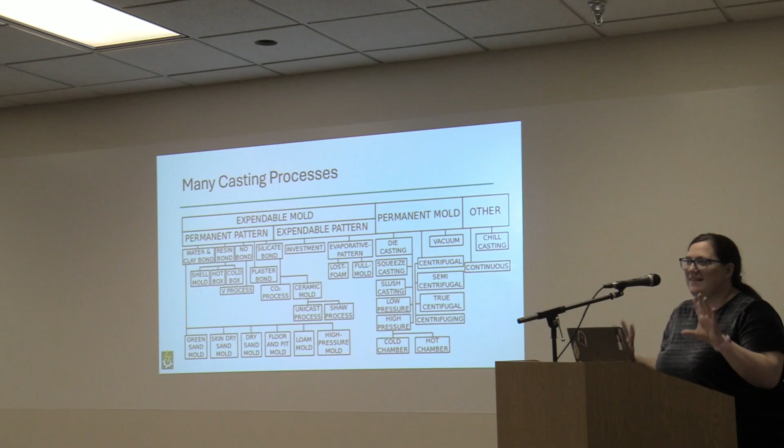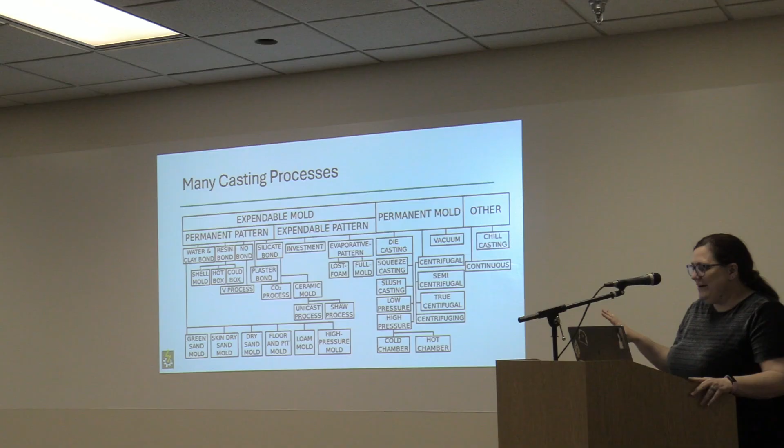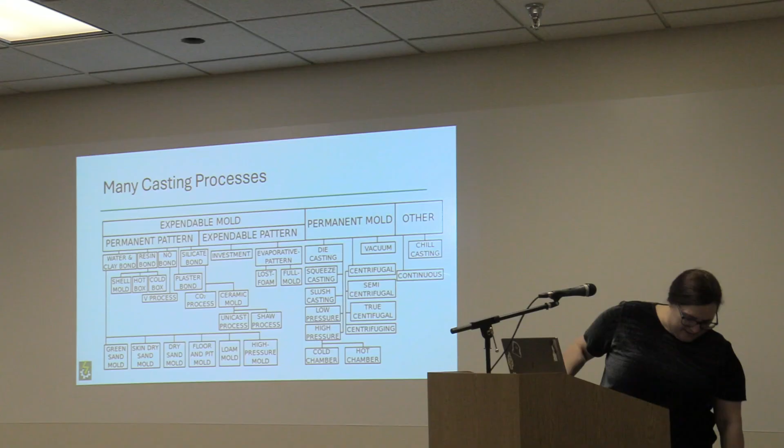There are a lot of casting processes. A lot of people just think, oh, that's just casting. This is one method of classifying things, and these are the conventional casting processes. They tend to group them by the type of mold, type of patterns. Some of these you might notice aren't things that make castings, right? People don't typically talk about steel mill processes as making castings - you're doing casting, but you're making bars or I-beams or ingots or whatever it is. But all of these things start out as castings.

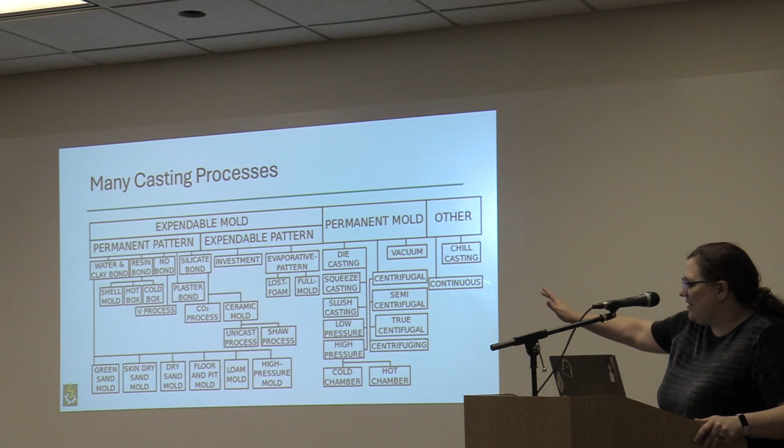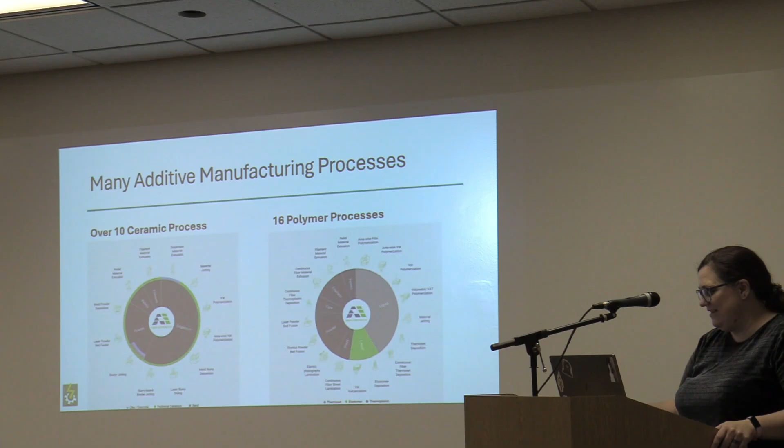That will come up later. They say there's 16 polymer processes using all kinds of different means, and they count over 20 metal processes. Then they kind of give up and just say miscellaneous, grouping a whole bunch of extra things they didn't feel like dividing out separately. They didn't used to include cold spray, but I guess they thought cold spray got big enough that it got its own part of the pie chart.

But some other things not listed: electrochemical additive. I used to work at Fabrisonic, which focuses on ultrasonic additive, a sheet lamination process. And there's all kinds of other things that aren't listed - new things being created all the time if you go to industry trade shows like I do.

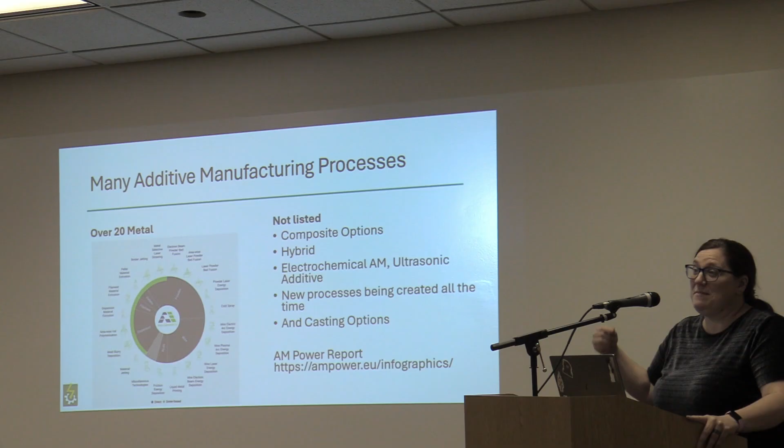And one of the things not listed here is casting. So when they define additive in metal, they're talking about metal as the feedstock, not that you're making metal. But from my perspective, that is misguided, I'll say. Because, like I said the other day, most people don't care about the feedstock, or really, they don't necessarily even care about the process - they care about the part they want.

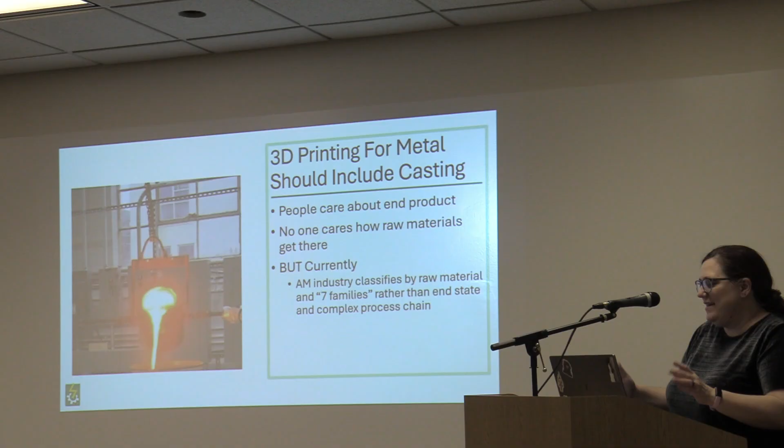And they care about that it meets their requirements, not necessarily how it got there. Actually, most people don't even care if it was machined or additive at all. They just want that thing, whatever that is. But currently the industry groups things by raw material, and a lot of times by these AM families.

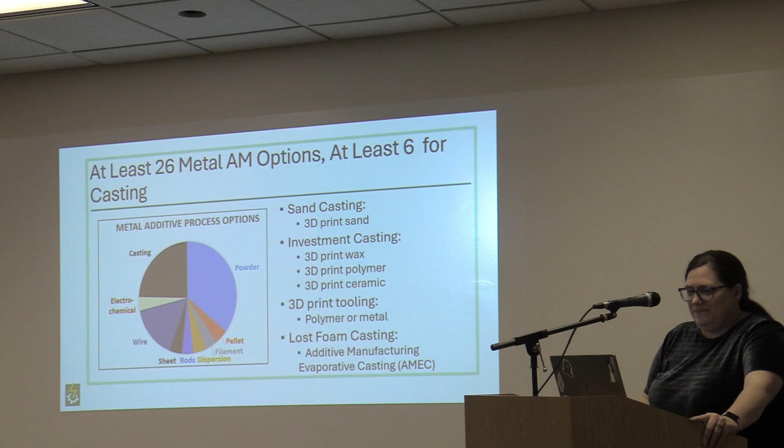So at least in my perspective, the metal chart should be bigger and include the casting options. There's at least 6 or 7 of these, depending on how you count, maybe more. But I'm going to talk about them here a little bit more in depth before I get into what we do at Skuld. We create sand, and there's a variety of things for investment casting, for tooling, etc. So how many out of these options there are really depends on how you count options.

So why would you want to use AM instead of these direct metal options? I know a few months ago you had someone, I think from Velo3D, come talk, because I saw that on the website. So they're already doing powder bed fusion 3D printing. So there's a number of reasons that people are really starting to look at AM for casting especially.

This is very much driven by the military and the government. So one of the problems, direct metal additive costs a lot. It can easily cost more than 10 times more than your traditional casting. So if normal steel casting might be $2 a pound, let's say, you're probably minimum starting at $20 a pound.

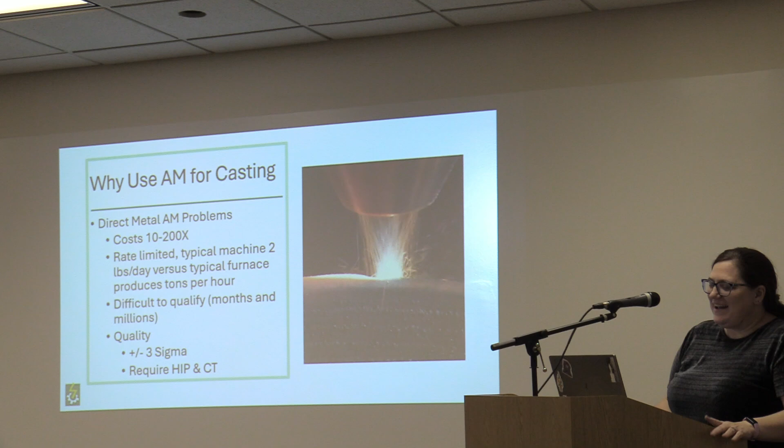I will get off that rant for a little bit. But I'm going to talk about additive and casting. So there's a number of ways that this is done. Probably one of the most common ways this is actually done is by printing tooling itself. It's not to directly go to the casting or the mold or the pattern, it's to print the tooling.

All those other additive processes I showed you could be used for printing tooling in theory. Most of the time people are using desktop FDM printers for that because they're cheap and readily available. You can join multiple prints together if you're trying to make something large. It's relatively inexpensive doing it that way. Although for bigger parts, sometimes people will print on other materials, and sometimes you have to have a tool that's metal.

So the main reason people are doing this is for large metal material for tooling, particularly ingots - very thick ones. These things are exponentially increasing in cost as you go bigger, and they have really long lead times. Like if you didn't plan for your die for Toyota 2 years ago, and now you suddenly need a different one, or it's defective, you might have an 18 to 36 month lead time to get that new metal ingot for that mold.

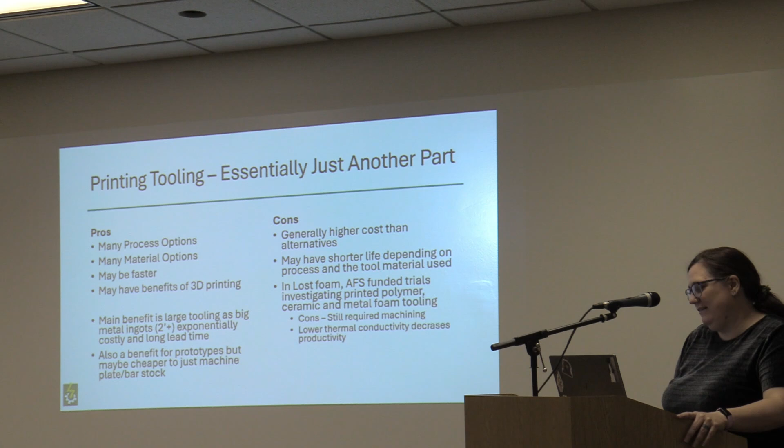Typically these things all still need machining. So that's part of why you're not necessarily benefiting doing that versus a piece of aluminum plate - because if you're still going to have to program the CNC machine, you're not saving that much having printed the material in the first place. The other issue, especially when they tested ceramic and polymer tools, is you can make foam that way, but the thermal conductivity is so much less that you end up taking something that might be a 2 or 3 minute cycle time, and now it's a half an hour cycle time. So that's not very good for productivity. Typically, people want aluminum molds for at least making foam.

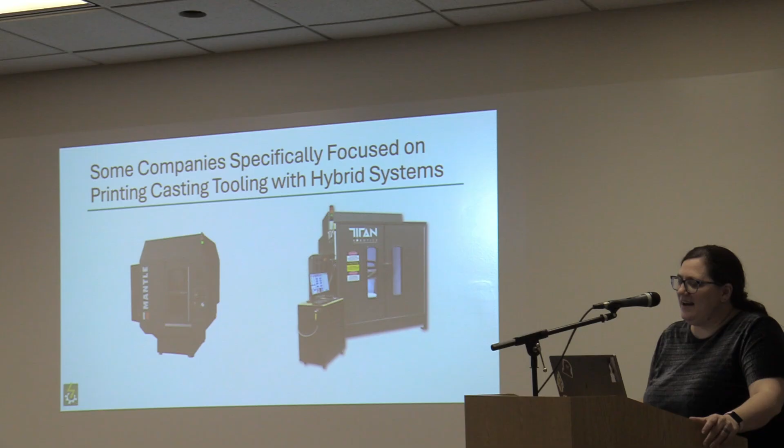There are some companies that are focused on making tooling specifically for the casting industry. I've highlighted two of them here. Mantle has an interesting technology - I don't exactly know what they call it, but they essentially put down this paste material, and then they machine it back, and that's how they get the tool. Titan Robotics has a giant polymer 3D printer. It's also hybrid, so it's designed to account for the fact that you might need tighter tolerances and have to get the tooling to required tolerances.

So to move on from tooling, let's talk about additive and die casting. I'd say this is the area that has, I guess, the least options besides just making the tooling. They will use various methods as well to make inserts, and that can particularly be helpful if you're trying to deal with something that has wear surfaces, and maybe there's just one little area that's getting messed up. So they might just use an insert and replace part of the tool in a certain spot.

It's also sometimes possible to iterate faster if you're using the additive versions. But big cons are that typically die casting is going to require a metal tool - possibly for permanent mold you might be able to have aluminum or copper depending on what you're trying to cast. But typically these are steel and relatively big, so now you're back to the original problem of these printed metal parts being very expensive. So people are not typically printing the whole tool, although sometimes they are doing this for conformal cooling benefits, just because of the cost.

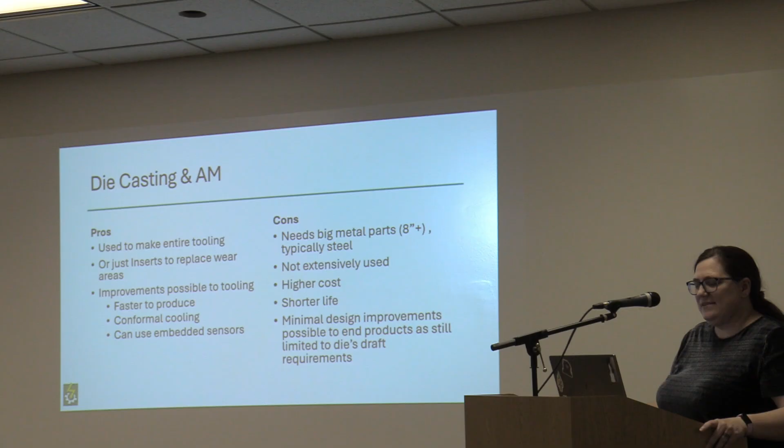There is one company that markets themselves, that I am aware of, specifically to the die casting alternative, which is Foundry Lab. They have a very interesting system that is essentially what I consider a kind of emerging category, which is a micro foundry. So this whole thing is a foundry - it makes your mold, it melts the metal, and pours the metal.

So it is very interesting in that it's an all-in-one system. They market it as a substitute for die casting, but as a metallurgical engineer, if your mold's not metal and it's a ceramic binder jet mold, you're not going to get the same representative properties as if you had used a metal mold. But people are using that for prototyping.

Every time you come up with a con, it seems like it's a fatal flaw. I don't necessarily think that. People use these, so they're drawbacks, like higher costs, but there are reasons people use these, so it's not like they don't use them at all. There are pros and cons to everything.

Would I choose to use this if the metallurgy properties were super critical? No. If it was close enough, or it was a less critical application, and if I'm doing this for a prototype, maybe it's adequate. Or maybe you prototype it that way, test it, it works, and then you can just keep making it this way. Is it die casting? No.

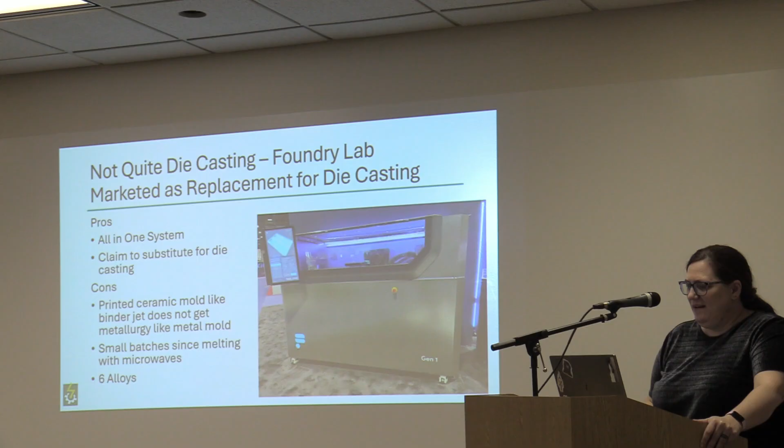Green sand and resin bonded sand - these are probably the most common casting methods. If you don't know what green sand is, it's basically sand, clay, and water mixed together. It's called that because historically green meant wet, like green wood means it's not dried out, so green sand means it's got moisture in it. This technology's been around for over 3,000 years, so lots of things are quite old technologies, but still useful today.

But they are using additive in that process as well. Green sand typically has about plus or minus 3% tolerances, which means in a lot of applications it's going to need machining, sometimes substantial machining. Because you're just packing together wet sand bonded with clay, it is a little bit more limited in the geometries you can achieve.

Resin bonded sand, I think that was invented in maybe the 40s or 50s. It's basically adding glue resin to the sand to make it stick together. It can have a lot more complicated geometries, it can also have larger parts, but often it's getting very significant machining. If you've ever been in a no-bake foundry, you'll know what I mean when I say it's more polluting, because when you pour those molds, that resin is getting burned during the casting process.

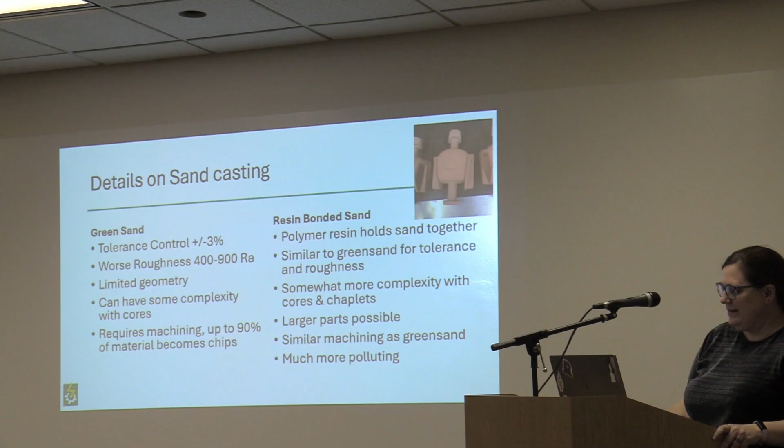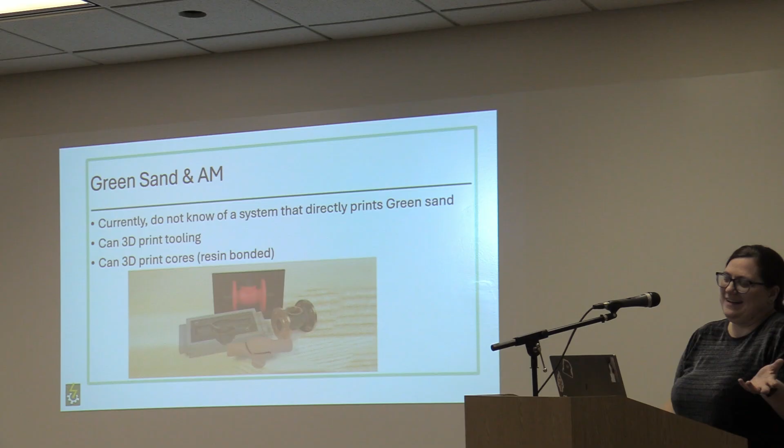So for green sand, they will use printed tools, and sometimes they'll also print cores - so it'll be like the green sand mold, but the core itself will be 3D printed with resin. That's probably the most common way. As far as I know, there is no system that exists that 3D prints green sand directly. It might be interesting for somebody to study that at some point - there are concrete printers and things like that, so there's no reason I think it couldn't be done, but I'm not aware of it.

Resin bonded sand, on the other hand, they will sometimes 3D print tooling, but more frequently they're using a process called binder jetting, where they basically put down a layer of sand and have a process that makes little glue droplets to build up the structure. This is being used primarily for printing cores. Sometimes they will print the whole mold, but it takes a lot longer and costs more than if you actually did the rest of the mold in the conventional way.

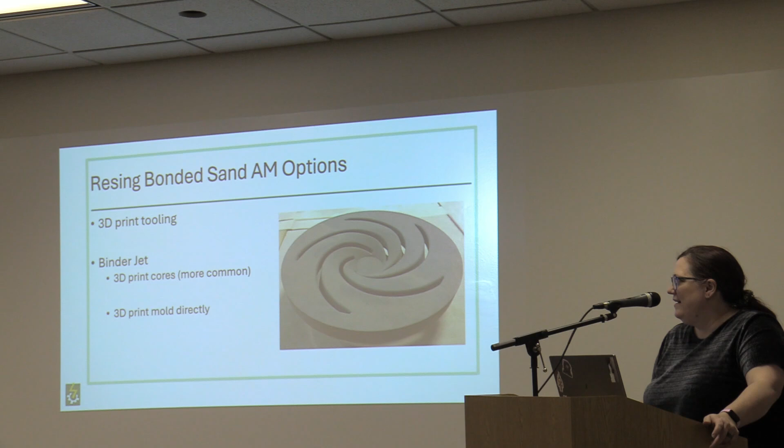Some of the big benefits for this is you can have more complicated geometries with these printed cores that would be difficult to mold. It can also consolidate what might otherwise have been lots of cores that had to be manually assembled, and they can just 3D print what becomes one core. When you consolidate cores, you eliminate this kind of stack up error from trying to assemble them.

So that's the main reason I see that they're being used. Also for very short runs, or sometimes legacy replacement parts, prototypes, things like that. It's being used fairly regularly.

The biggest drawback I see here is actually that I think it's reflective of the market. Almost all of the sand printers are owned by the pattern shops, which basically shows that it's not necessarily enough of a business case for most foundries who do sand casting to buy them themselves. So they rely on the pattern shops to be the places they buy these cores or molds from. That kind of goes to the expensive nature, the equipment's expensive. There's a number of issues as well, like print heads clogging frequently and things like that.

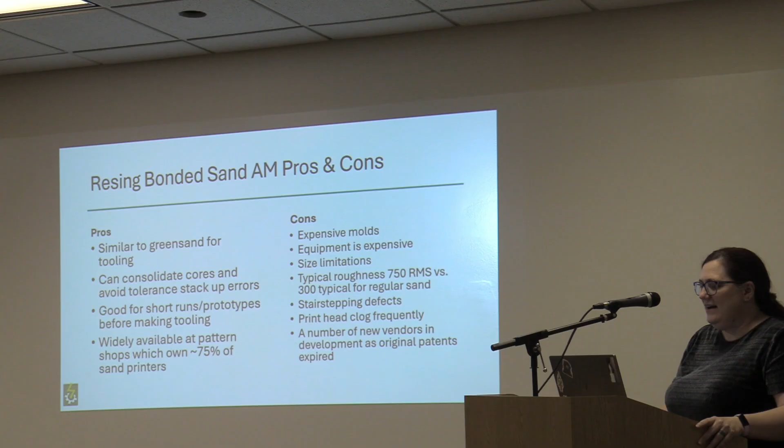So, lost wax investment casting. Who here is familiar with lost wax? All right, a couple of hands. I bet most of you may be wearing a lost wax casting on your hand. If you're wearing a wedding ring, good chance that's how it was made. Lost wax is used in everything from jewelry to turbine blades, but it's actually the oldest foundry technology, going back nearly 6,000 years. I guess around the time humans invented pottery, they invented the ability to cast in ceramics.

But at a high level, how lost wax works is you make the shape you want in wax, you put a very thick ceramic coating on it, you let that dry, maybe there's a whole iterative process of this, but ultimately you melt off the wax and remove it, and then you have a hollow space that you can pour into this ceramic shape to get the part you want.

So limitations of lost wax: I've never seen it make really large parts. Typically they're making about 120, 150 pounds or less. It's very good for very small things like jewelry. There are some challenges with internal passages. You can make internal passages, but what happens is that ceramic is inside the passage, and then they have to dissolve it with sodium hydroxide. So that's kind of a nasty process. It's possible, but people try to avoid it.

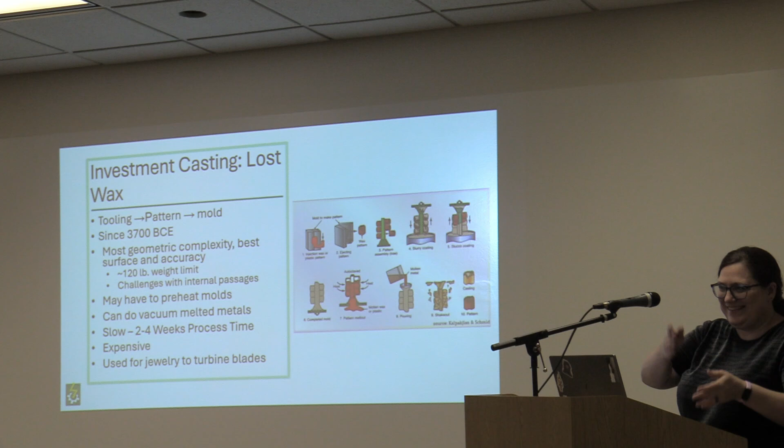And the biggest drawback is that it's a slow process, especially for bigger parts. You're talking process time of 2 to 4 weeks, not queue, not lead time, just the steps of how long all these steps take. So if you're using 3D printing, you're typically having a very similar process time. You make it a little bit faster, but typically that is an issue.

But at this point in time, additive investment casting is pretty much always what is used for prototypes. I've been told that nobody is making tooling anymore in investment casting until the design is locked down. But if it's a prototype, it's going to be done additively. It's also a very good process for very small things. Actually, if people come to us with inquiries for very tiny parts, we will just direct them to one of the other additive investment casting people.

They also have issues when they print like this with ash getting caught inside of the mold, which causes metal defects. They have problems with molds cracking due to thermal expansion of the print when they try to burn it out. There's all kinds of challenges in these areas, even when they are being used. But due to the cost, that tends to be a recurring theme, and typically, if it's not a custom low volume thing, at some point they will switch to tooled standard lost wax.

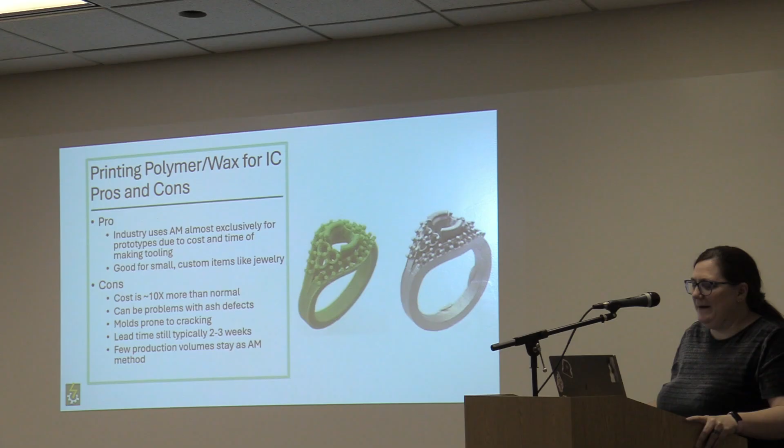There's also additive for directly printing the ceramic shells. I actually had a tour very recently at a company called Aristocast, which is up north of Detroit. There are other places using this, but basically they use resin printers that are full of ceramic in that resin, and then they can print very highly intricate ceramic shells. Aristocast told me that they had actually developed a process to be able to make the famous GE fuel nozzle, which is a big additive thing that was developed with powder bed fusion. They demonstrated that you could make it this way as well. They had things where they were making suppressors, like some pictures here off their website - very complicated shapes can be made this way.

Drawbacks: you still have to dissolve and basically get rid of that polymer part of the resin, and then you have to sinter the shell. They often will still assemble this on a wax tree, so it's still going through this very long process, which is why these still tend to take several weeks of process time.

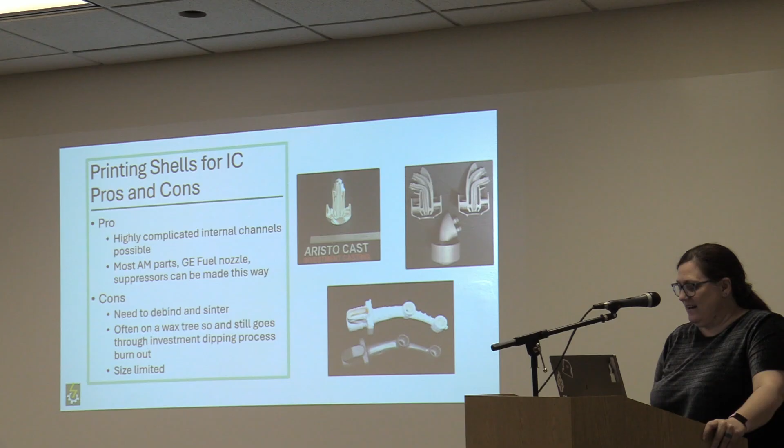These printers, I'm not aware of any that is more than about an 8-inch cube. I think that's typically the size I've seen on these. There might be a few slightly bigger than that, but they're not making anything gigantic this way that I'm aware of.

All right, so now I want to talk about what we do. I'm giving you all this background on other ways that you could use additive.

I'm going to take a little detour into lost foam, which is the parent process of our additive process. Who here is familiar with lost foam? I know one person, okay, a handful. All right, great, I will give a brief overview for everybody else. So lost foam is a variation on investment casting.

Instead of wax, you make foam, and we will still assemble it in a cluster or tree kind of situation, similar to lost wax. But one of the key steps that's different is that our ceramic coating is about 1/100th as thick as traditional investment casting. Whereas traditional investment casting, the shell might be 3/8 of an inch thick, let's say, in lost foam it's about 3/1000 of an inch thick.

That shell, we don't even call it a shell, we just call it a coating. It's not structural. So what actually holds everything together is the fact that after the coating dries, we vibrate sand or ceramic beads around that coated foam.

And people always say, oh, so you're printing the mold. And I'm kind of like, it's not exactly a mold. It's a little ambiguous because typically a mold means a hollow space, but there's actually no hollow space. It's sometimes called full mold because of this.

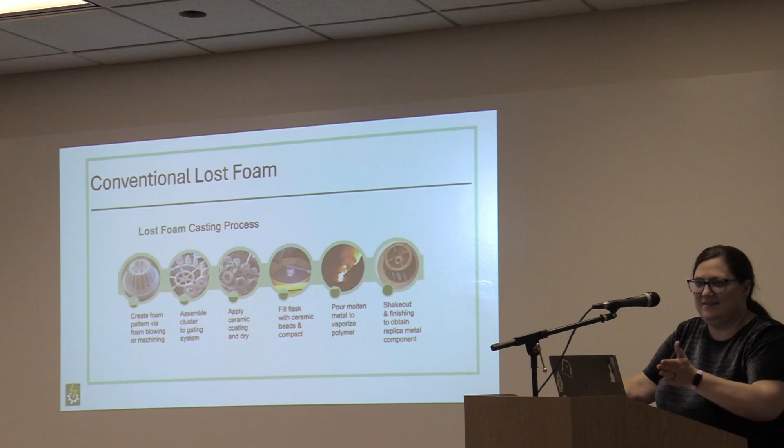So what happens is you pour the molten metal on the foam, and the foam vaporizes, and simultaneously it fills in where the foam had been. So this is how this process works.

So I kind of went through what these differences are between lost wax and lost foam. There are benefits to both processes depending on what you're trying to achieve. Lost wax does have better tolerances, it does have better surface finish. I would prefer that process if I was making very fine, intricate, detailed things.

Lost foam, on the other hand, can make bigger parts. It's better at interior channels because it doesn't have that thick ceramic there. And where it really is better is on process time. So several weeks versus, in some cases, as little as 3 hours. I'd say a day or two is more typical. I mean, that's like we are super trying to expedite things.

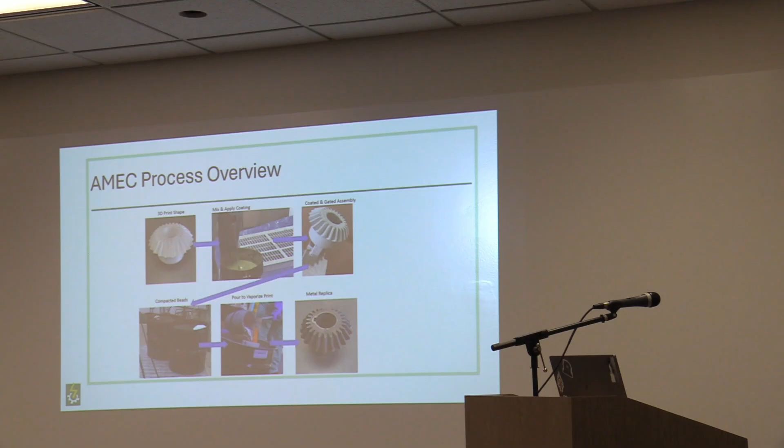I did bring, I need to remember to hand these out because otherwise I totally forgot. I did bring an example here of a print, a part that's been gated together, it's not coated yet. And then the final casting for a metal gear that we made. But the process is very similar.

Ceramic coating, let that dry, compacted ceramic beads, pour metal on top of polymer, vaporize it. One thing you will notice looking at the resulting metal, it's very much what you see is what you get. So you do tend to see the print lines or print defects, as the case may be.

Yeah, we use ceramic beads, but that's what we use in regular lost foam as well. The main reason we use beads is actually more for silicosis risk. Silica dust, or silica sand turns into silica dust, which causes lung problems. So the beads cost more up front, but then they don't have that problem because they don't wear away. So it's kind of like a much higher one-time investment.

But do you have better permeability with the beads?

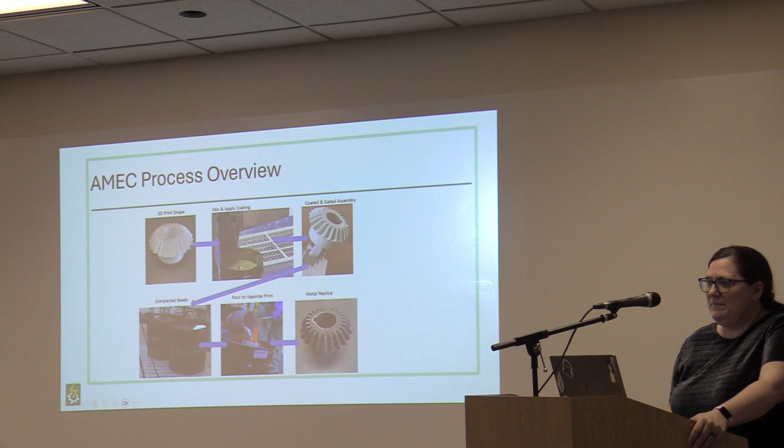See how that one's different looking than this picture here with the coated assembly? I probably should have brought one of these, but I didn't have one available. The ceramic coating basically looks like a paint, and it's very thin. So you assemble what you have in your hand, you put the ceramic paint on it, let that dry, then vibrate ceramic beads around it, and then pour metal on it.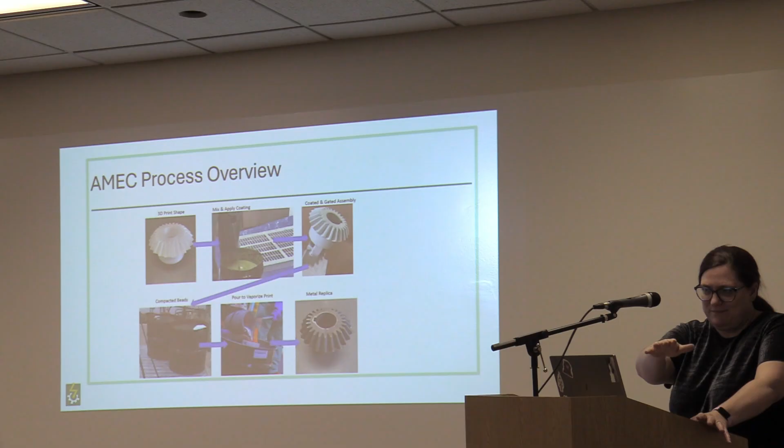So the coating becomes the mold for this? If we go back to this, what happens in lost foam and AMEC is that - this actually does have some hollow space, but essentially I guess you could consider all of it together becomes the mold. It's just that it's filling in.

I'm familiar with the green sand method, where you force it into sand, the sand keeps the shape, you take that out and pour metal in. This stays in - that's the difference, it's coated, it stays in there, you pour metal directly into that, and that goes away. So the metal's on the inside of this? The metal, that goes away completely, and the metal replaces it - so it's like filling in and vaporizing at the same time. So you don't have to do the green sand jolt squeeze on the outside.

So what we call it the sand. And it could be sand or it could be ceramic beads. The key difference is that it's not bonded, it's just loose, so it vibrates together, and it's just packed together while you do this pouring process.

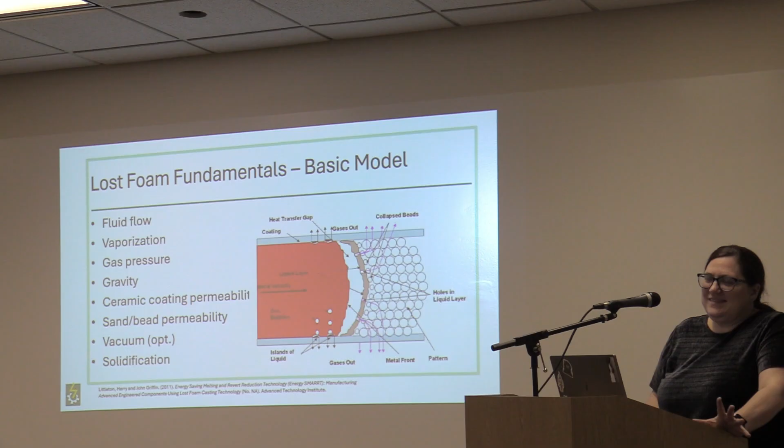The mold stays in there. It's plastic and it's 3D printed. No, it gets vaporized, so that's a different way of thinking about it. So if we wanted to say where's the mold, it's this gap. You have metal, foam, and then it's filling in, making a tiny channel as it fills in and gets rid of the foam.

Does that kind of make sense? Entertain another question. I expected to see that form of the solid. You printed the shell. Is that what you molded?

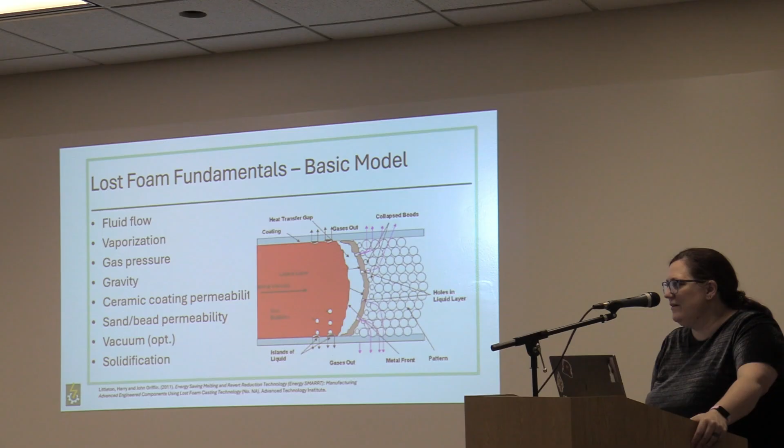Yeah, typically with the additive version, so if it's the foam version, it's solid foam, just very low density. When we do the additive version, we try to print as little as possible. So it could be entirely hollow, it might have some infill. It depends on what we're doing.

So what's the size of the ceramic beads? Oh, I don't know that. They're real tiny, right? Small, yeah. Bigger than metal powder, but smaller than, I don't know what size that is.

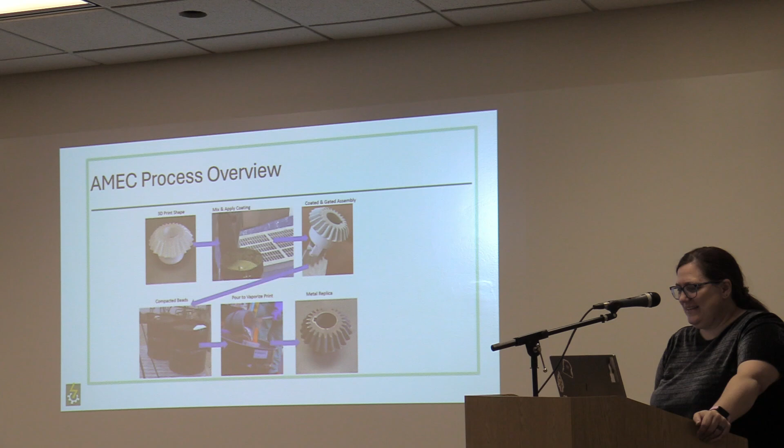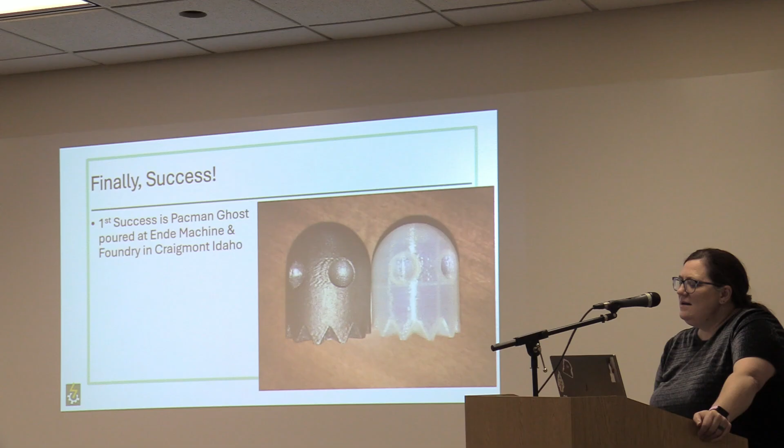Your walls have to be supported. You're pouring in fairly heavy metal, and you think that shell that retains them is fairly fragile. It is supported by the sand and the beads.

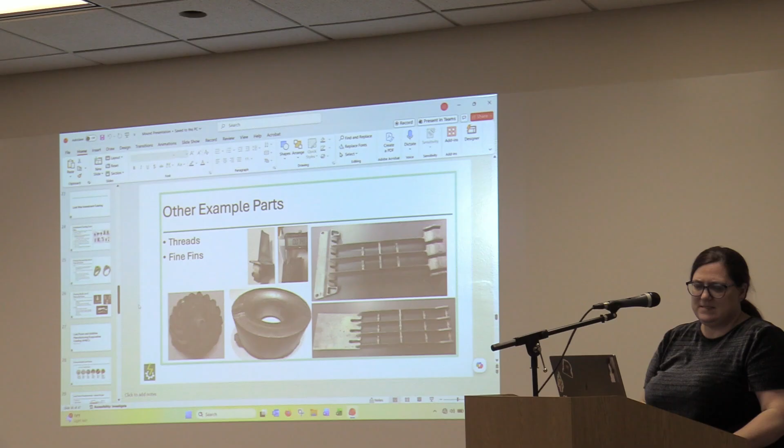So one of the advantages to your company is the ceramic coating. It keeps the detail and keeps that thinness of the shell down. That's what I'm seeing, right? That's one of the things that sets you apart from some of the other processes?

I would say the main difference is a couple of things. One is, which is probably going to segue back to this - for us, we also do lost foam, so we tend to use this process as a prototyping method. It's not quite as accurate as regular lost foam, but still far more accurate than sand printing. We think it's about plus or minus 0.5%, whereas sand printing is more like plus or minus 3.5%. But the other way that it's better is it's much faster.

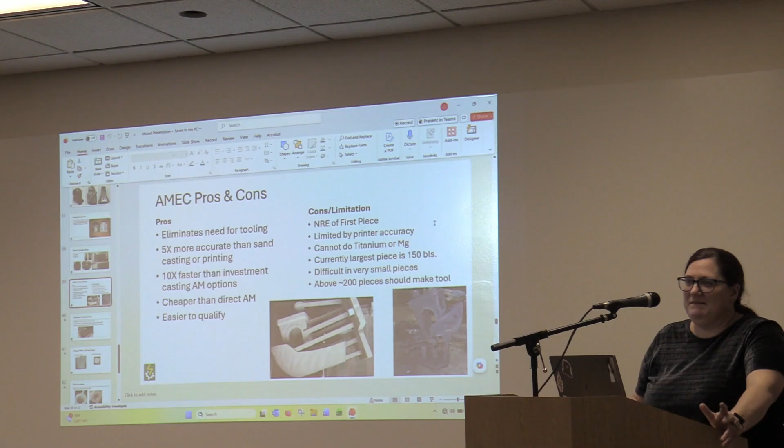You still have to machine the final piece. That depends, right? So that's very much a question of what's the required tolerance. That'd be a major labor cost savings. Right, so it depends on what's the requirement. So usually our goal in lost foam or AMEC is net shape. Sometimes it does need machine stock because somebody wants a really high tolerance. Typically sealing surfaces, the surface roughness is not enough.

Do you support the inside of that polymer? Sometimes, yeah. Well, sometimes it needs it because of the sand, but sometimes it needs it because it's very hard to print flat, blocky, chunky castings, which is how most castings are designed, right? So a lot of those geometries don't lend themselves to polymer printing because they are just like in this big flat space.

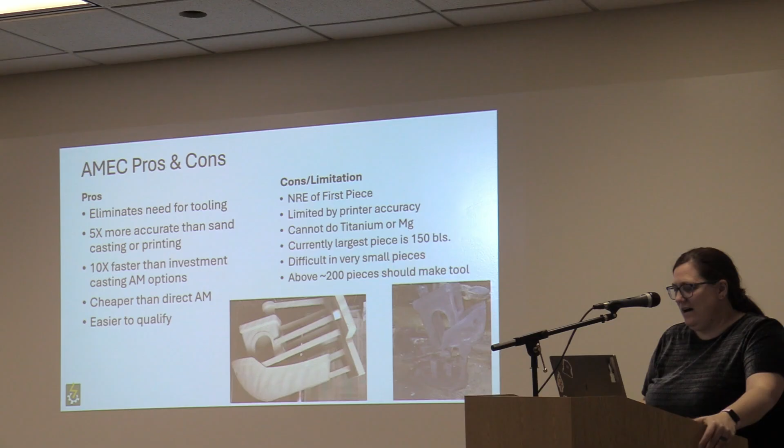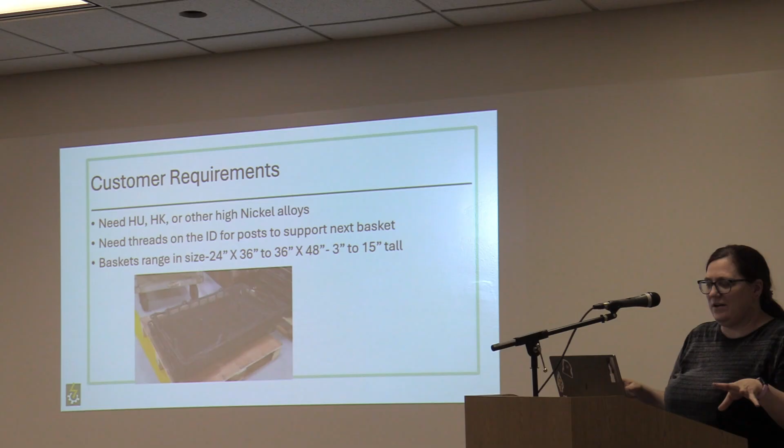So that actually leads us to another thing we sometimes do, which is we actually will merge these processes together. It's not just all or nothing. So sometimes we will merge them.

So this is a case study we actually talked about at the AMEC conference this year. In this case, we were working with heat treat baskets, and the customer wanted threads, and being able to vary where the threaded post could go. So we actually developed a way of prototyping it where we would machine the foam, and then instead of, it's very difficult to machine threads when you only have a 3-axis mill for machining foam. So we actually made the threads by 3D printing a little insert piece that we just glued in there, and then that was able to make the threads.

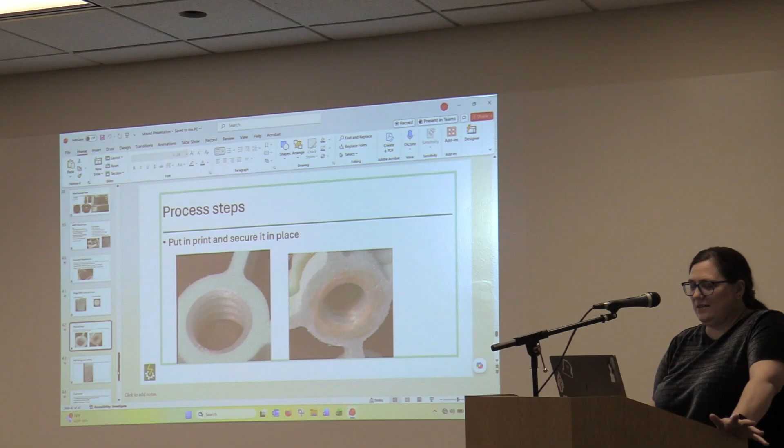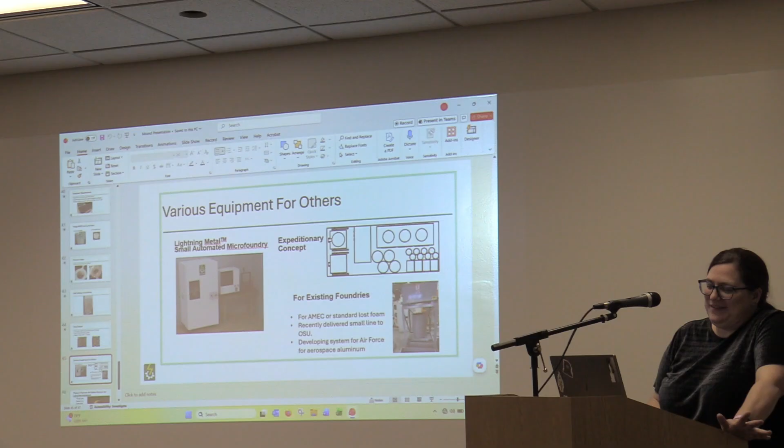So I guess I'll end with one thought, and just if anybody has other questions. But I think somebody asked, is it all cons? And everybody's saying, right, but if you only have a hammer, everything's a nail. Well, I think it's important to be aware of all these processes and the options and where they're good and where they're bad, because there isn't just one process, and we don't even just use one process, right? We have CNC machining, we do lost foam, we have machined foam, we do additive version, we'll mix them all together. It really depends what we're trying to do.

So with that, if anyone has other questions, yes? I had a question about, is there any patents associated with the process of licensing? Yeah, so we have a patent pending on the AMEC process. It's been approved in Europe because they're apparently a little bit faster than the US patent office. And then we have a couple patents on equipment, and then certain materials that we're doing. One of the innovations we've been working on in lost foam and in AMEC is the ability to cast rare grades of aluminum. So we've been able to do 6061, 7075, and other grades that are typically not cast. So we have patents on that, depending on that too.

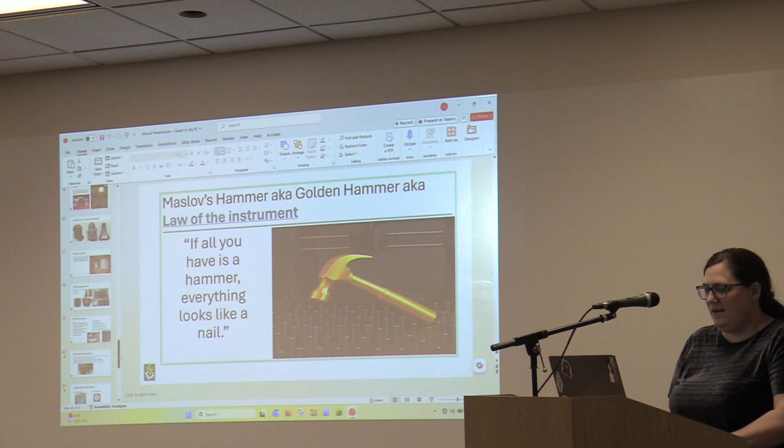You mentioned a couple metals that just don't work well in additive manufacturing. Do you think there's going to be a change in that? Tungsten, I forget what metals were, but. Oh, yeah. Well, that was unique to our process. So, yeah, so lost foam. So titanium needs to be kept, it's very reactive, and it needs to be kept in a vacuum. So while we've never tried it, our expectations are that it would probably explode because we're creating a polymer gas that degrades into water. We don't think that it would play nice with titanium. Now magnesium, I have seen papers out of Oak Ridge that claim it can be done, but I don't know anyone doing this commercially. We've never tried it. I'm not exactly sure what sort of magic pixie dust is needed to make it work.

Magnesium is also very reactive when molten, so that's kind of unclear to me how they got that to work. The other thing people sometimes ask me about that I'm like, okay, that's not gonna work, is your refractory metals. Those metals melt at higher than the ceramic temperature would melt at, so tungsten probably would not work without some major re-engineering of the whole ceramic system.

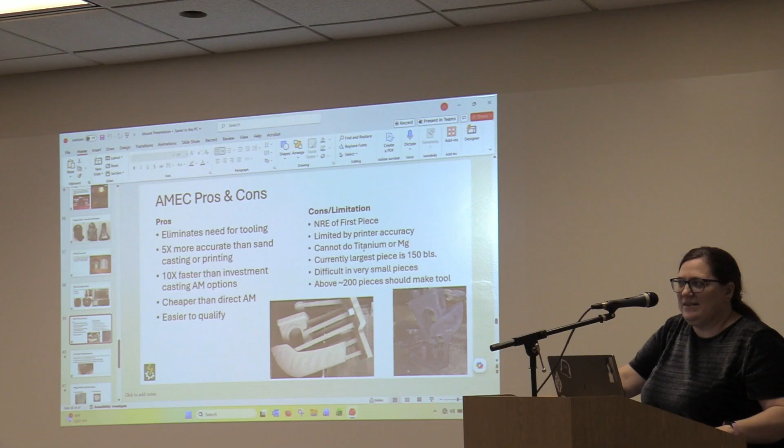So what are the alloys that you can do today? Mainly we can do pretty much anything that can be air melted as long as it's hot enough. So aluminum and above: aluminum, steel, iron, copper alloys, nickel alloys. We've never tried tin, I don't think tin's hot enough, I don't think it would vaporize. Ductile iron, yeah, we do ductile iron, like any of the cast iron grades. We have sometimes done grades that are typically vacuum melted, like Inconels, but they get contaminated with oxides, so there's kind of a property hit when you air melt those. It's not due to the casting process, the same thing would happen if you poured them in a sand mold.

Any innovation on surface finish improvement? We've done some work there. We can make it somewhat smoother, but it's still not going to be investment casting. But there are methods to make it a little bit smoother.

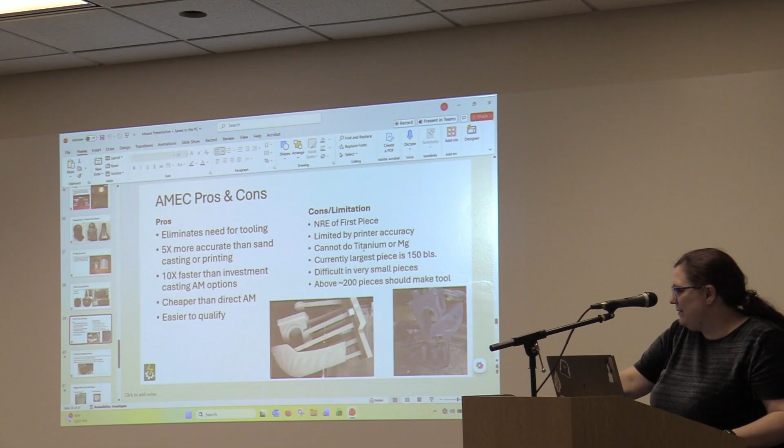I have about 3 questions. Right around here in your presentation, you mentioned HU and HK as alloys. What were those? Oh, those are called stainless grades, but they're like 40% nickel and 10% chrome or something like that. They're super high nickel, chromium, high temperature alloys. These particular alloys are used in the heat treat industry because they're going up and down in heat treat furnaces.

Still talking about alloys, one of your first remarks was that we're developing alloys. My guess is by that you may have meant we're not inventing new alloys, we're finding alloys and exploring their compatibility with this. Is that correct, or no? You're trying to come up with new alloys to address issues here, what did you mean by that? So sometimes we do make what I would consider non-standard alloys. That's some of the research we're doing with DARPA, to make things that are not conventional alloys. But yeah, generally we're using existing alloys in the process.

And then my final question was, you mentioned with investment casting, after you've melted out the wax and burned it to get rid of the residuum, you still may end up with ash. Here, you still have the possibility of some remnant of the polymer left in there. Is it less an issue because you have so much less of it, or choice of materials, or process parameters, or is ash still something of an issue? So what we think is happening is the reason we don't see an issue with ash is that ash is a remnant of burning, and the burning doesn't happen in the mold, it happens outside. So there's not enough oxygen and then that polymer gas gets pushed out. What we do see is about 0.01% carbon absorption in the metal.

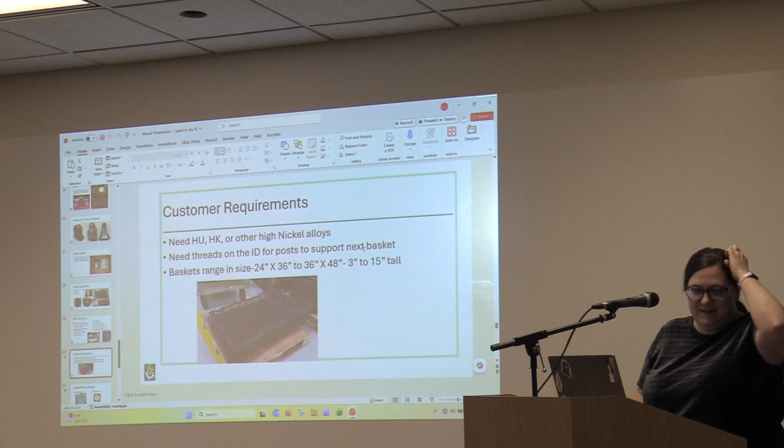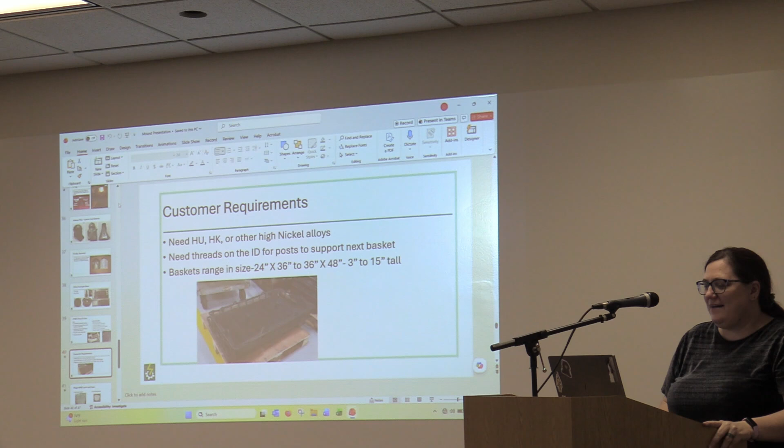Is that it? I had a question. You talked about green sand and the resin that they use. What is the actual thing, what causes the pollution out of the resin? I mean, I'm not a chemical engineer, but it's just that you're basically burning it. The resins are typically petrochemical urethanes. They're a urethane resin.

I used to do that for a living, or so. Urethanes, yeah.

Polymers, yeah. And I guess kind of related to that, we actually aren't legally allowed to do those kinds of castings, because lost foam is considered de minimis for air pollution below about 10,000 tons a year, and so we worked with the EPA to get them to agree to that. But if we were to cast green or resin bonded sand, we would exceed the air emissions at about 1 ton per year. So it's drastically different. All right, thank you.